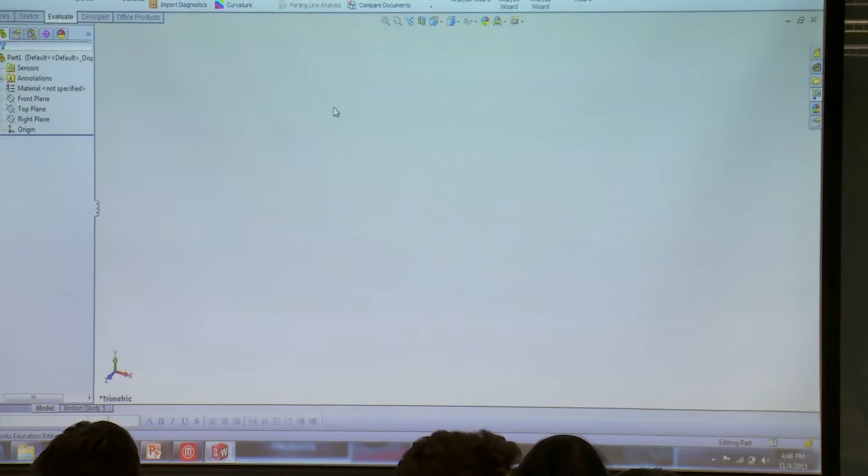Okay, so you're going to start here with just a blank screen. I always double click to get back to the basics, so you're going to want to double click any time to get through something.

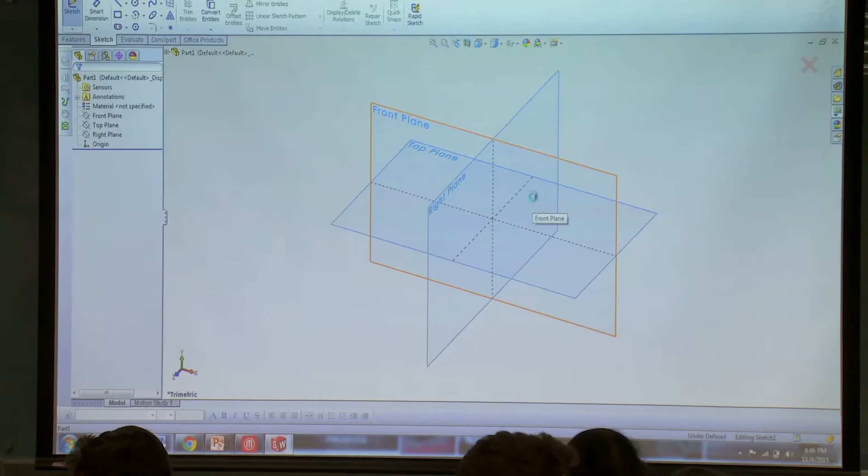The first thing we're going to do is sketch a rectangle. You go up here to sketch, and then you click rectangle. These are all the different pieces you can freehand sketch, which would be one-dimensional or two-dimensional. Every time you sketch something, you have to select a plane - you can pick any one of these. I'm just going to select the front plane, and then click and drag to draw myself a rectangle.

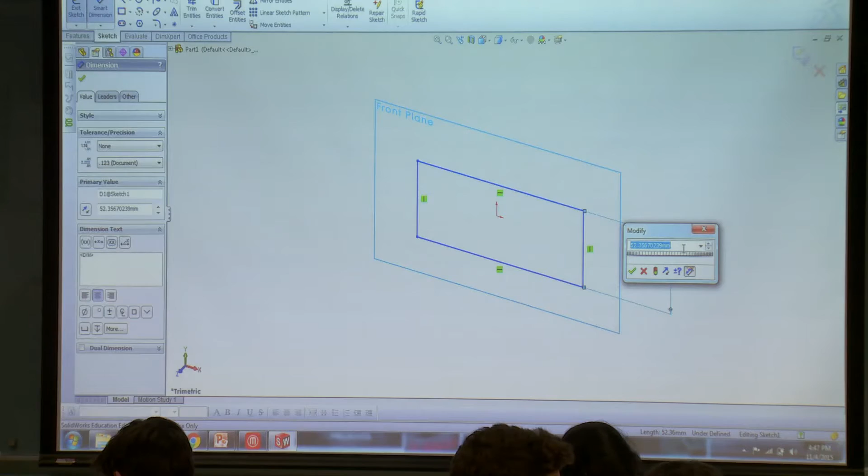The next thing I'm going to use is the Smart Dimension tool. Smart Dimension allows you to set the dimensions of any line. I think right now I'm working in millimeters, and you can type in the dimension right here. I believe if I use inches, it'll take my inches and convert it. So I'm just going to make my birdhouse 3 inches right here, and then I'm going to make it 5 inches on top.

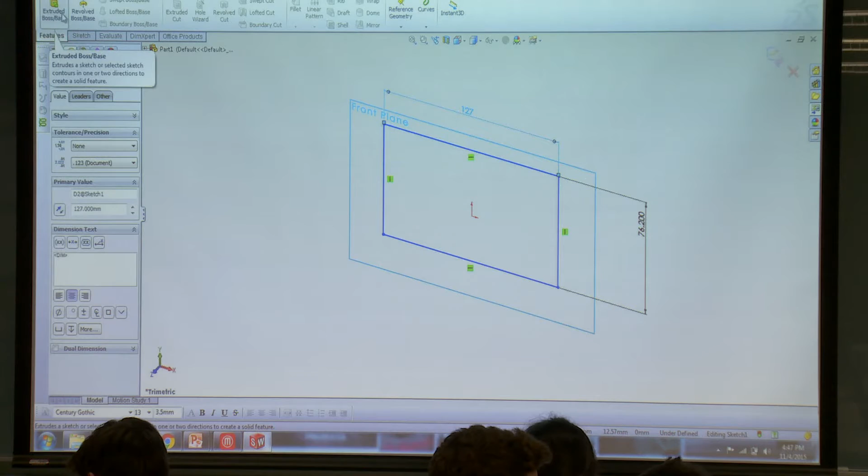So next, we want to make this 3 dimensions. We want to go to features and do an Extruded Boss. These are all the different features you can use in 3 dimensions. Extruded Boss brings the 2 dimensions out into 3 dimensions. So we're going to set that to be half an inch thick.

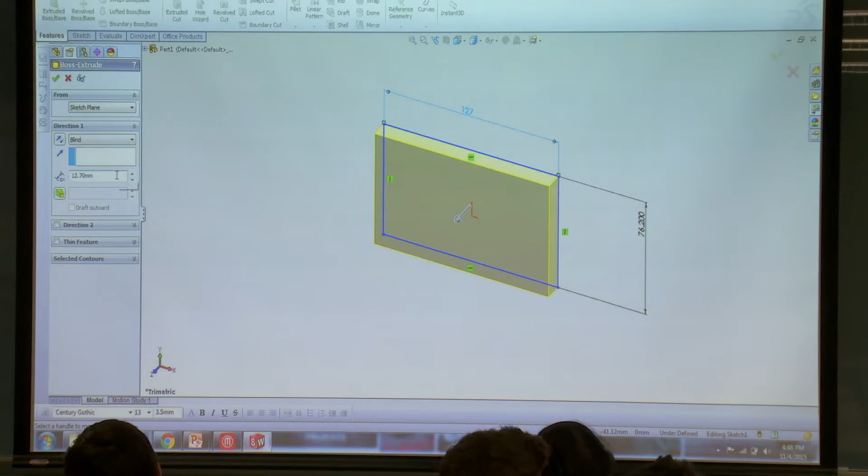And then you just click OK, and there it builds it. You can always double click off. So all right, there is your first plane of the birdhouse.

Is everybody following along? Is anybody having trouble? It looks like it's not square. Or, no, it is. Oh, okay.

All right, you can use your arrow keys like I am. If you have a mouse, it's a lot easier. You can click and drag to kind of move your piece around. But I'm just using arrow keys right now.

These tools at the top, you can use to kind of zoom in. This one on the far left will zoom to fit. This one allows you to zoom into an area, so I could just take it and zoom right into the corner. The magnifying glass takes you back to the previous view.

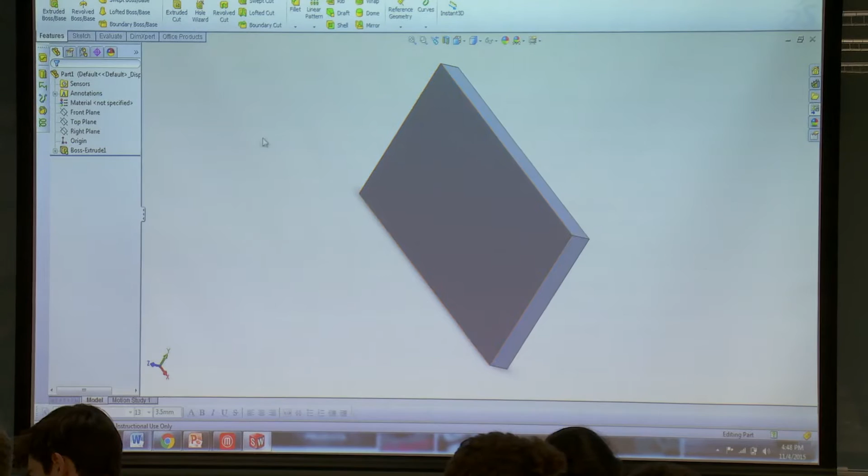Okay, so now we're going to build the walls of our birdhouse. I'm envisioning this right now as the base, even though I built it on the front plane. You can kind of look at it from any perspective that you want.

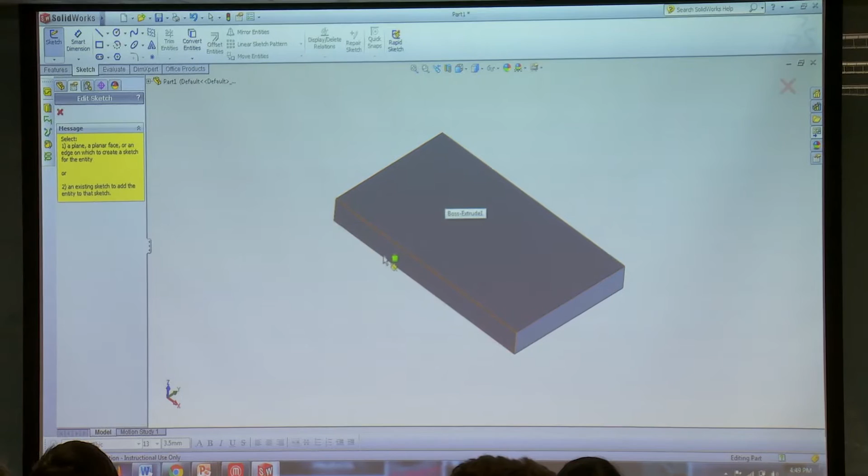So I'm just going to go back to Sketch, and I'm going to select the Line tool. Now the first thing you have to do every time you do a sketch here is select the plane that you want to sketch on. So if you look around, I could sketch on this top plane, or I could sketch on any of these side planes as well. So I'm going to sketch on the top plane.

And then you click the top plane. Now I'm going to draw what would be my walls. So you click, I'm going to click inside, and then I'm going to drag to the other side.

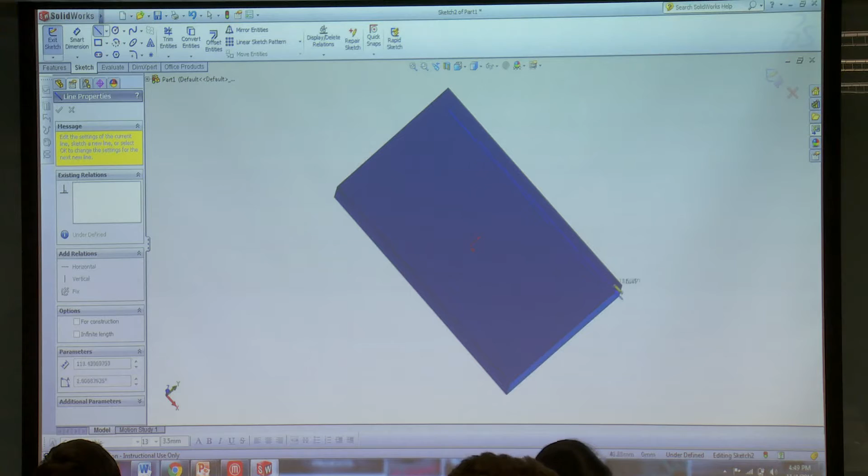You'll notice that the line should kind of lock parallel to whatever edge you're on or close to. So I'm just going to click and draw all these lines, basically a rectangle, and you can kind of see when I bring this line up, it'll line up, and you'll get a cross section right there, so it'll be tangent with another corner.

The orange dot means that it's going to be tangent and collinear, or co-pointal, whatever, with that point.

So now what I want to do is double click off that. In fact, I don't even think those go together. Yeah, no. So you want to make sure your box there is completely filled, lines through. I'm just going to make sure that that's done right.

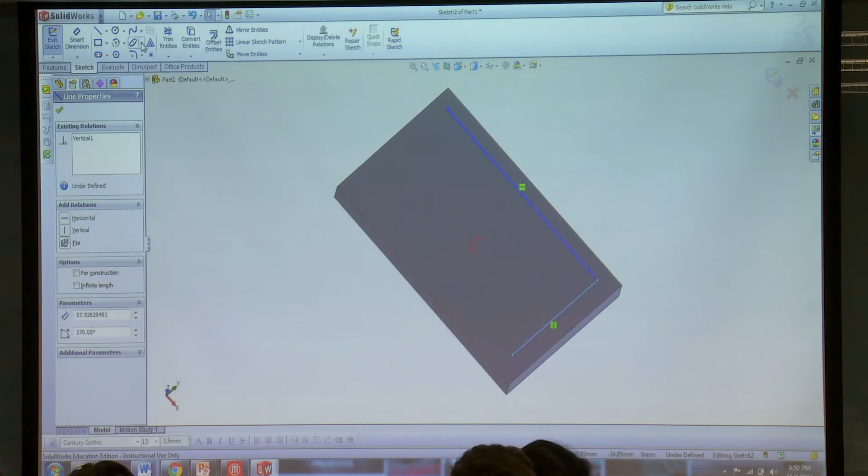Okay, so now I'm going to go back and use the Smart Dimension tool. You can click on a line and Smart Dimension it. So I want the inside to be 2.5 inches.

Now as you can see, the outsides here are a little off, they're not proportional. So what I can do is a Smart Dimension on this side to set the distance between these gaps. So I can do 0.2 if I want, and that'll kind of move it.

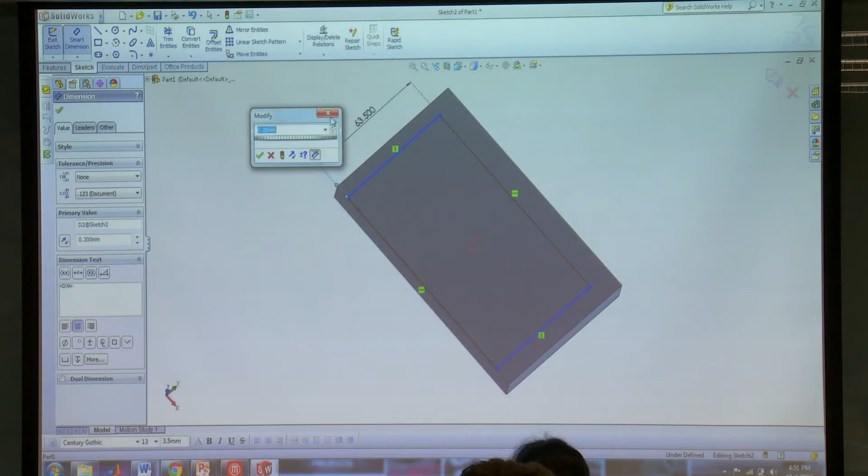If I want it to be exact, I could delete the Smart Dimension. And what I can do is select two lines. So I'm going to draw lines to the edges.

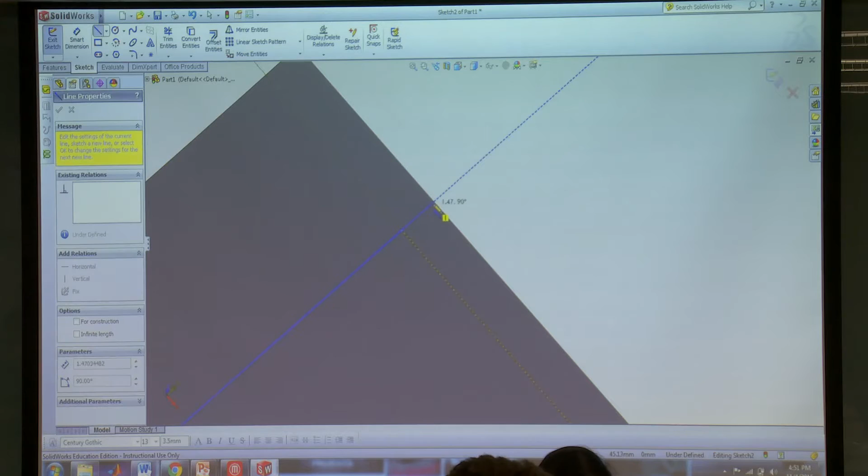This is a chance that you might want to use the zoom in tool to really zoom in there. So now I can select these two lines.

So often you want to double click out to get back to your mouse. And then I want to make them equal.

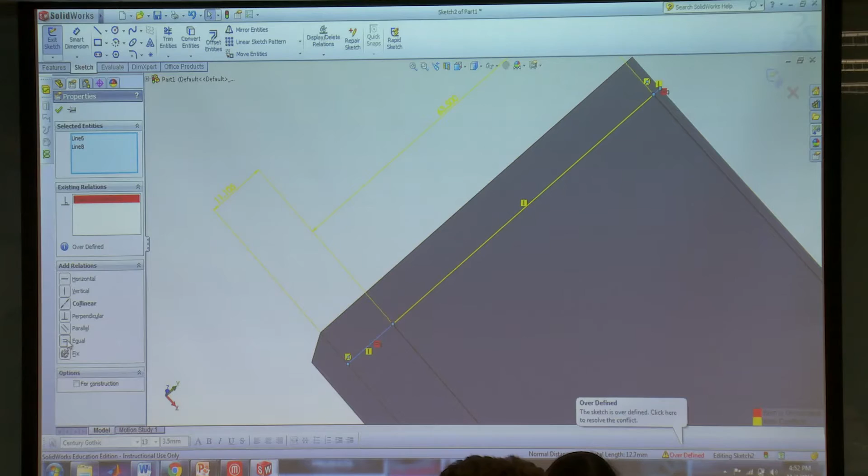Oop, alright, we have an issue. Because this is Smart Dimensioned, oh yeah, I want to delete the Smart Dimension. That's the only way to make them equal.

Is everybody following along with this part? This part's a little trickier, but there we go. We got them equal now.

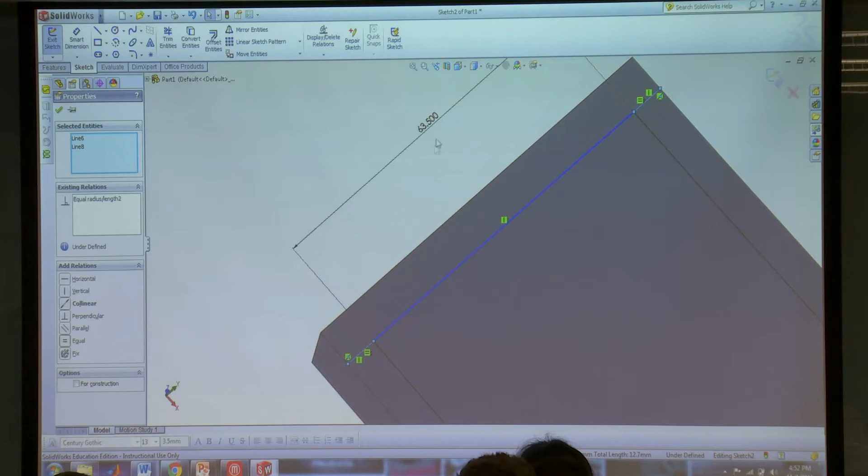Yeah, is there anyone who needs us to pause? How do you get rid of the Smart Dimension? You can just click on it and then delete, push backspace or delete.

How do you make the two lines equal? So if you go and you select the two lines...

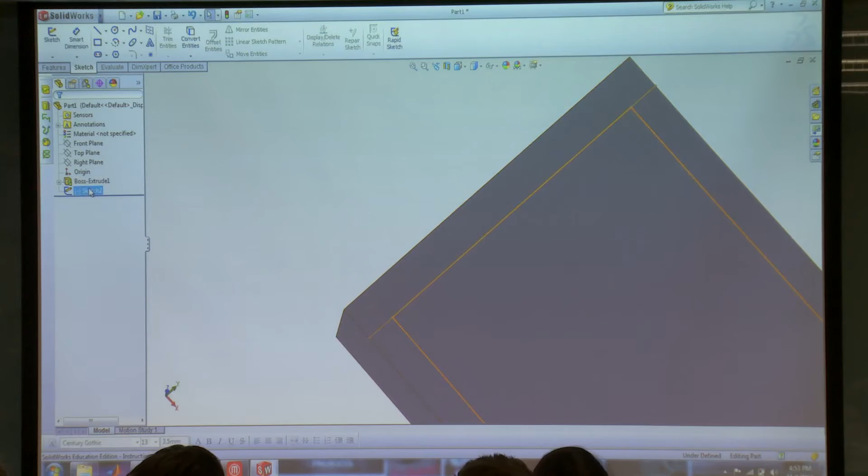So if you ever need to go back, right now I'm back to the main screen, the main project build. So if I click on Sketch 2, I can go up here to the top left and hit Edit Sketch, and now I'm back in the part that I was just working on.

Whereas Boss Extrude 1, you can always go through and title these as well, was that initial base that we built. So if I click one line, it'll select it.

This is how I make them equal, and then I hold Control, but you can also use Shift I believe. You can select the other line, and then there's all these different options down here. So I just clicked equal. So if they were lines that needed to be parallel, I can make them parallel, perpendicular. You can fix 2 points to the same point.

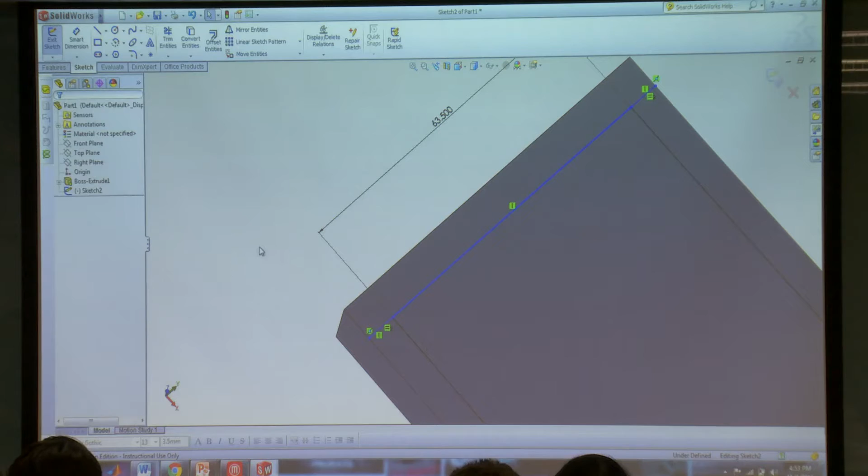And then I double click to get out. I always use double click to kind of get my way, to kind of move back outward.

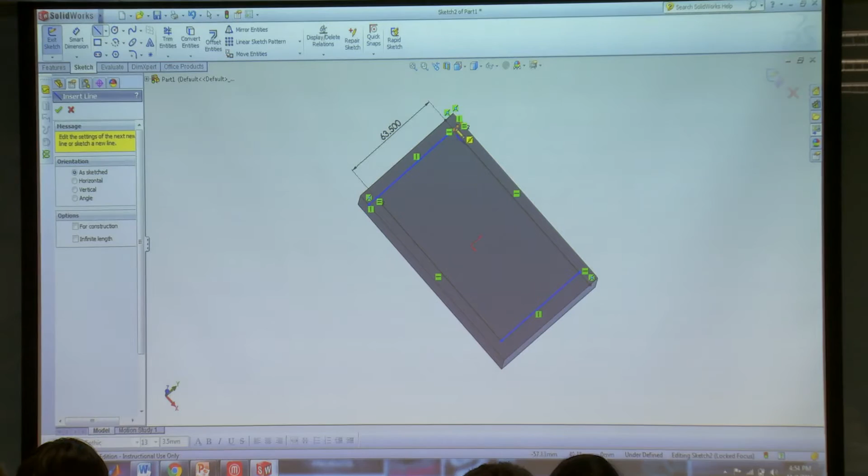So let's go and do the same thing quickly with the other sides. We're going to build 2 lines from these points, and we're going to make them equal. And once they are equal, you can kind of set the dimensions on either way. So as you can see, we use the smart dimension to build this line, but we could do it the opposite way. We could set the smart dimension on the width, or on the gap if we wanted, and it would make the 2 lines equal based on the one smart dimension.

Okay, so now our box is equal all the way around.

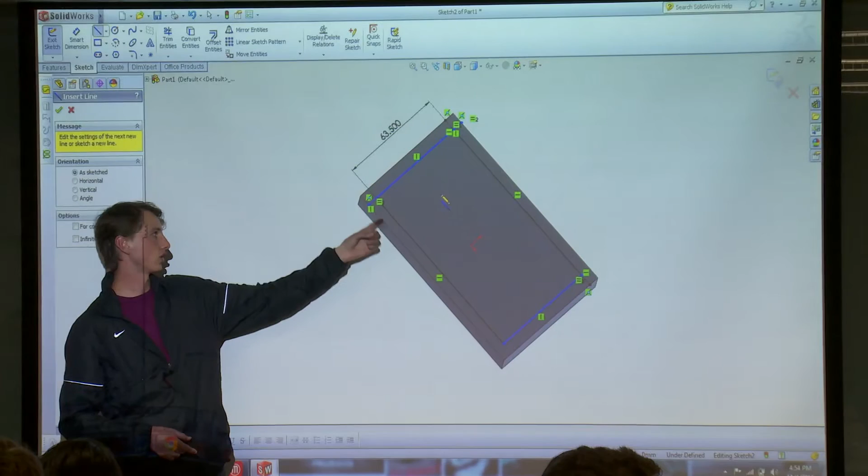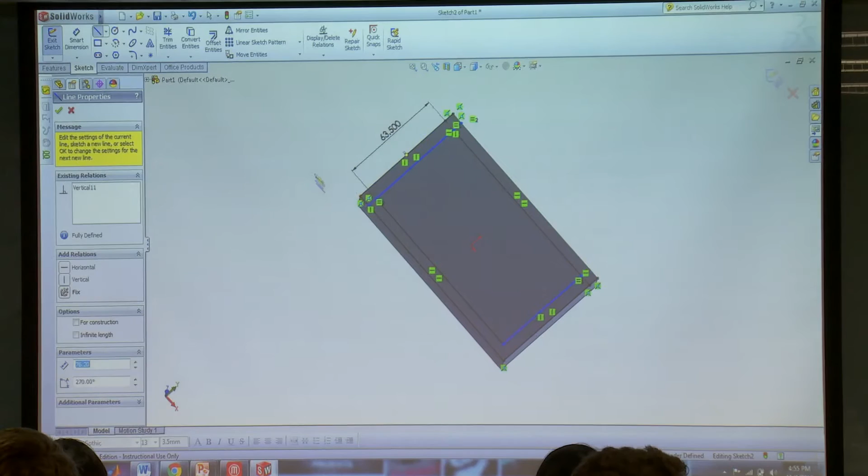So now we're going to build the walls up. What we need to do to build the walls up is we need an enclosed surface. So we could build up right now the inside of the box, because that's considered enclosed by these 4 lines, but we want to build up the outside. So we need to actually draw new lines along the edge, since this is considered a separate sketch than the first one. So you can just use the corner points, and you can just do it in a couple clicks. Just draw to the corner points, each line. Every time you draw a line, if you noticed, it kind of picks up and draws and plans to draw the next line until you get back to a point. So there's our 4 lines around the outside. So now we have the outside of the edge of the wall and the inside edge of the wall.

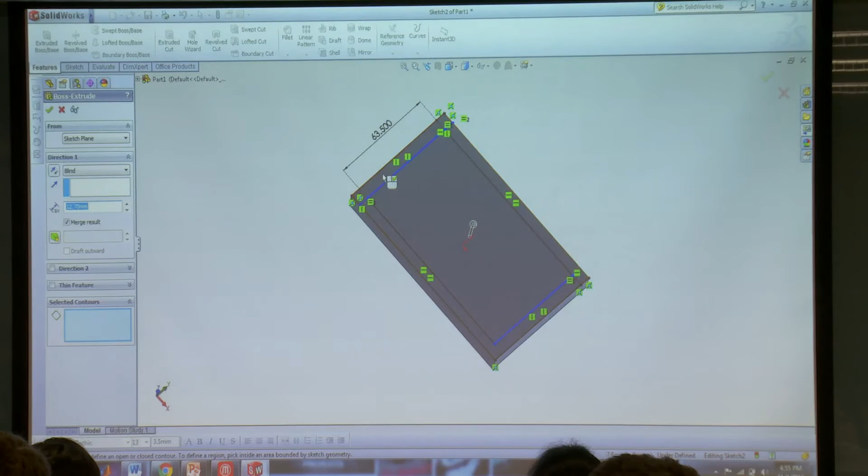So next, we want to close out of that, and we want to go to our features again, and we want to do a boss extrude. Now this time there's multiple spots to choose. Last time there was only one thing that could be boss extruded, but as you can see, the red part is what's going to be boss extruded. So you can kind of select these different points, and it'll be set up to extrude what I selected there.

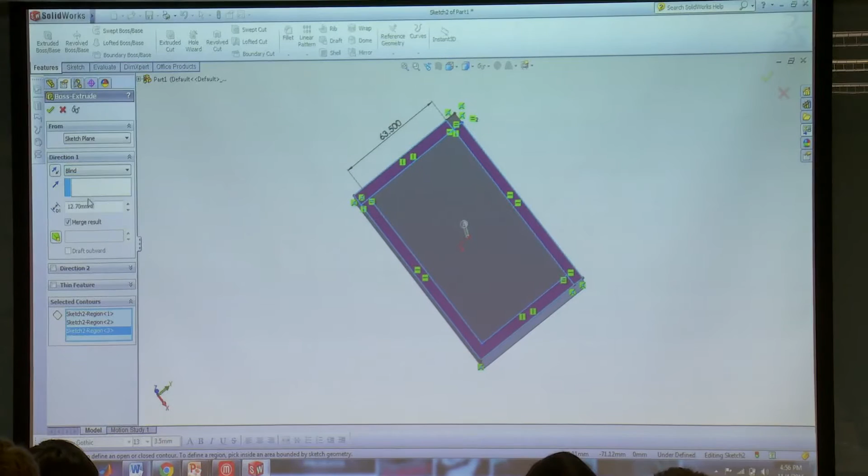There are different options to boss extrude. Usually we use blind - that's how you set just the distance and do it yourself. Sometimes you'll want to do up to surface, so if you have like 2 planes and you want to connect something between them, you can do up to surface and select the surface, and it'll automatically boss extrude up to that surface. So right now we're just going to do blind, and we're going to make our birdhouse 3 inches tall.

And then we check it, and we have rebuilding errors. Might be because there's lines there too. Yeah, it doesn't make it full. There we go. Okay, so make sure you select all the different points around the edge. Those little extra lines that I built to equal out the sizing kind of caused some issues in there.

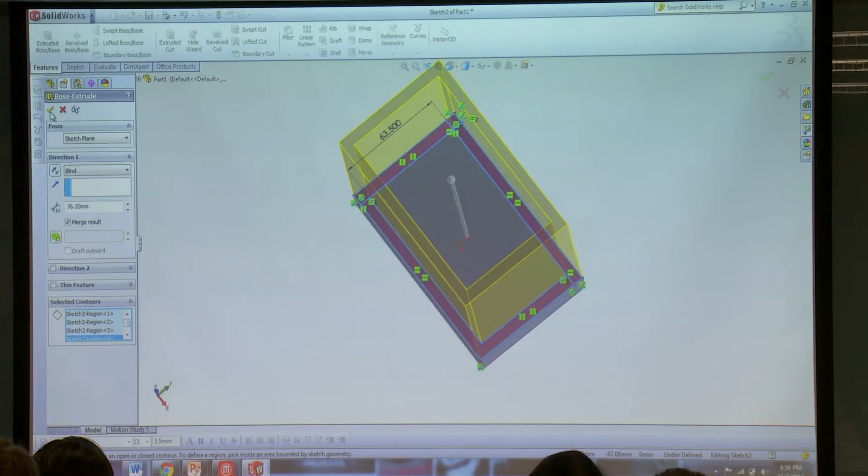Alright, so there is the walls of our birdhouse. So if we double click, we're back to... do you have a question over there? Yeah, how big is the extrude? I set it at 3 inches. You can set it as tall as you'd like.

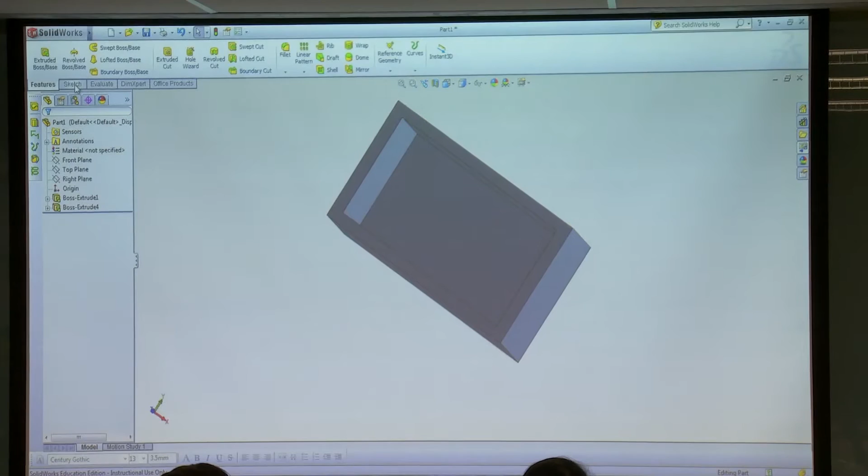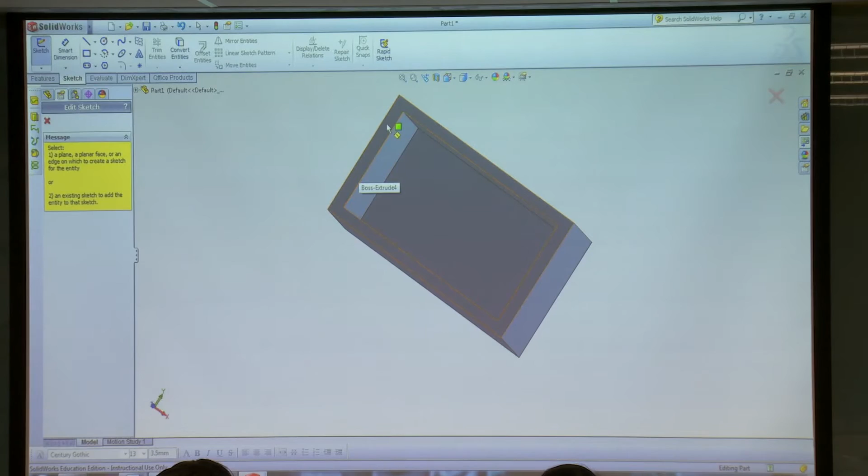So now we're just going to build the top, and we're going to do it the same way we just did the walls, except it'll be a little quicker and a little easier. So we're going to go back, we're back to the front. Is everybody back to the front? Double click out, and then we're going to select the sketch, draw another line. This time we're just going to use the rectangle, because that's easy, and we know that this is a rectangle. We're going to select the plane, which is the top face here. So you don't want to select down in here, you want to select this top plane. You can kind of see how it gets selected. So we're going to select that, then we're going to come from this corner and just drag our box down to this corner.

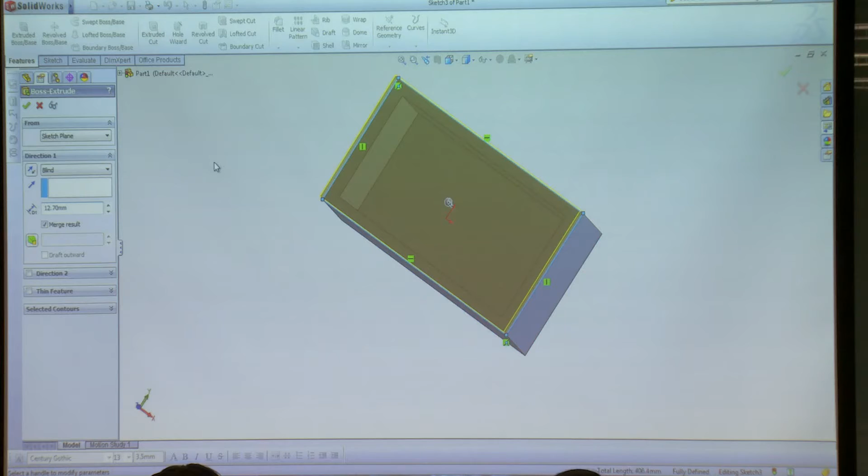Simple as that, and then we're just going to boss extrude that one. This time we only want it to be a 1/2 inch thick. Alright, so now we just have what looks like a box, but we know that it's hollow on the inside.

So now we want to put a little hole in it for the bird to fit in. So we're going to pick the circle tool, the same way we've done the past sketches, but this time circle.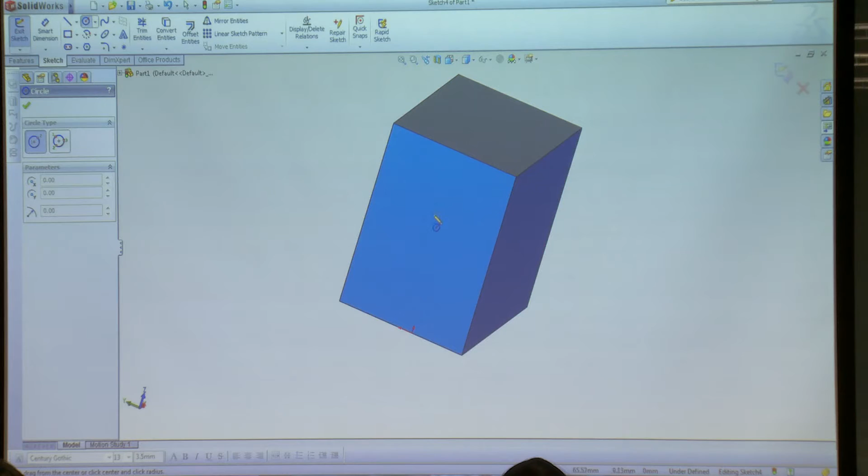We're going to select the face. You can select any face that you want. The circle tool works, you build it from the center. So you select the center, and then you build it out as far as you want. I'm just going to build it anywhere, and then set the dimensions of it in a sec.

So there's my circle. I'm going to use Smart Dimension to pick the radius of the circle, or the diameter. So I want the diameter to be 1 inch. So there's my circle.

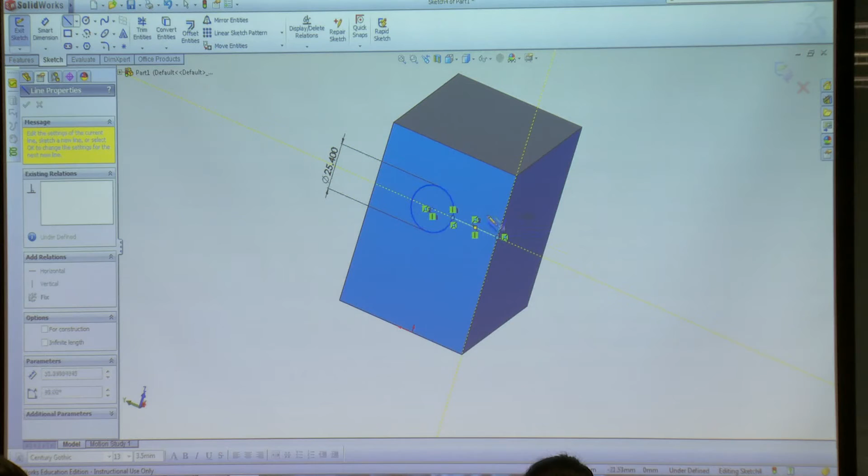Now you could use lines to set up where your circle is, the same way we set up the walls. So I'm just going to set 2 lines on either side and on the bottom. You see where I'm selecting the lines? The points come up so it's tangent, and then I can select it so that it's down. When something highlights orange, that means you're going to be tangent to it. So there I've selected my lines, or I've drawn my lines.

I want to set these 2 to be equal, so that way it's centered. And then this one, I'm going to Smart Dimension, so that I know how far the circle is from the bottom. So I want it to be 1 inch.

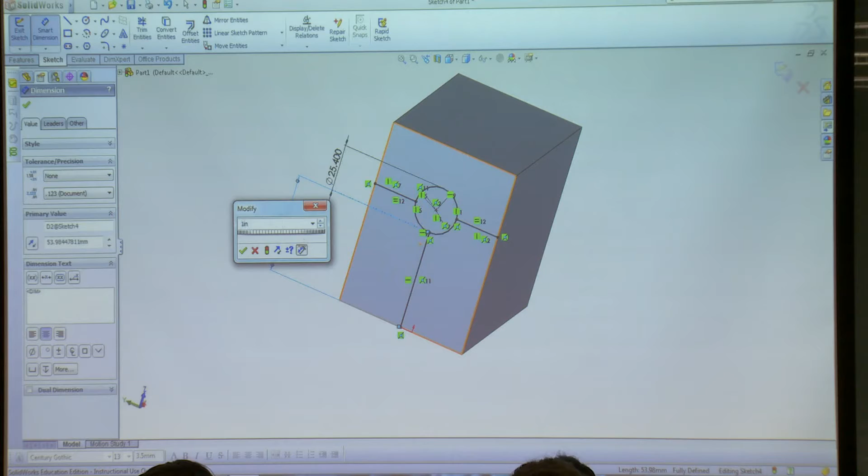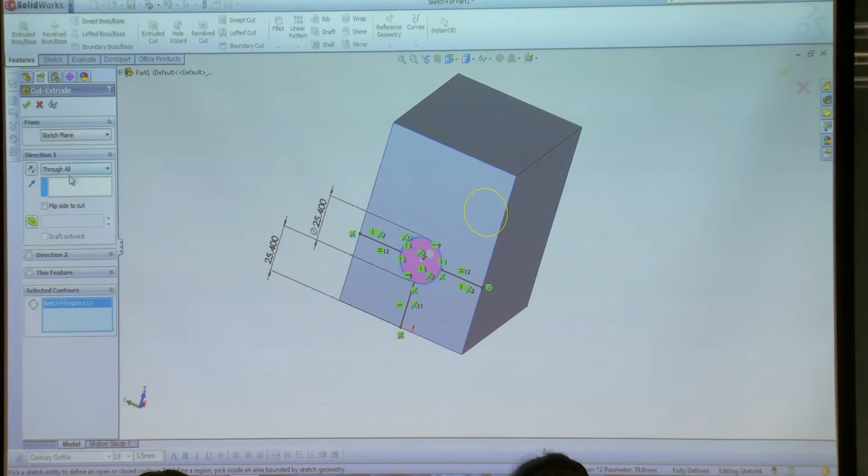Now we're going to cut the circle out, so we're going to go back to our features. We're going to use Extruded Cut, select the circle. And this time, instead of using blind, I'm just going to go through all. Now if you notice, that will actually go through the other side, I believe. So if I do through all, we can check it, and we can see that it does go through all.

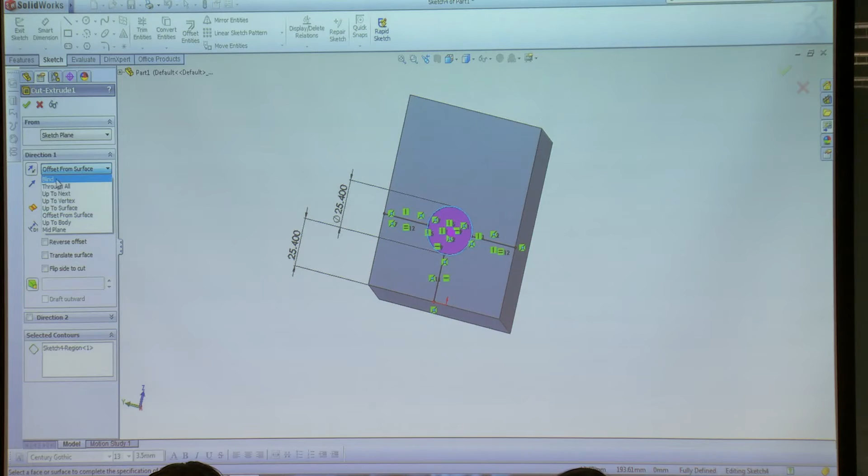So actually this would be a case where we would want to use up to surface on the other side. To go back into it, we can click Cut Extrude, go to Edit Feature. I'm not going to use up to surface just because I can't see the inside of the box, but I know that the thickness of the wall is a certain amount. So if I set this to 1 inch, it should be enough to cut through.

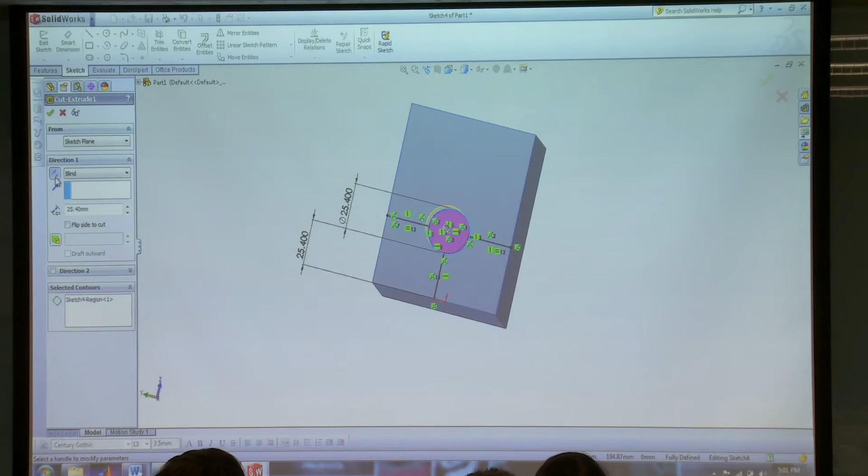And it didn't go the right way. So this little button here, it selects which way you're cutting. So if I click that way, obviously it's trying to cut out of the box, which wouldn't exist. So I want to cut into the box. So right there, I've cut into the box.

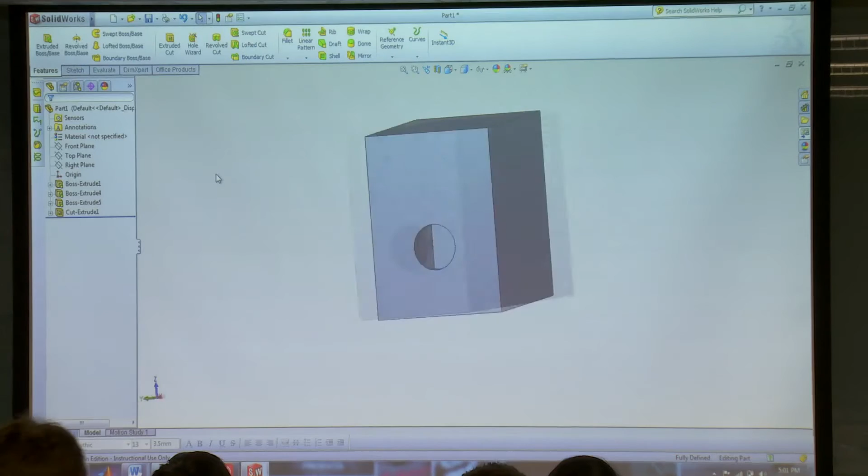And now we basically have our birdhouse. The last thing we're going to do, what you could do is go through and add a little post, but to save time, we're not going to build a little post right about here. What I just want to show you guys is how to round off edges, which is pretty simple. You just use the fillet.

So because what we've done is already built, we don't need to do a new sketch. We can just go to fillet, and we can select the edges that we want to fillet. And then we can select, this is the radius of what would be the fillet. You'll kind of see it once I select it.

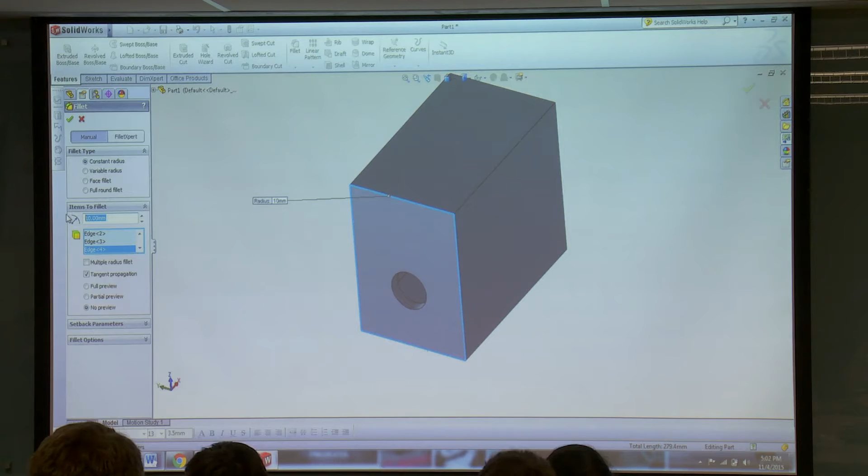We're just going to do this in millimeters. I guess 10 millimeters is probably pretty good, and we'll see how that looks. So there we go, we've rounded the edges. And you can kind of get a feel, if you want to go back and make them less round, you can change the radius. You can kind of get a vision of what it's going to look like.

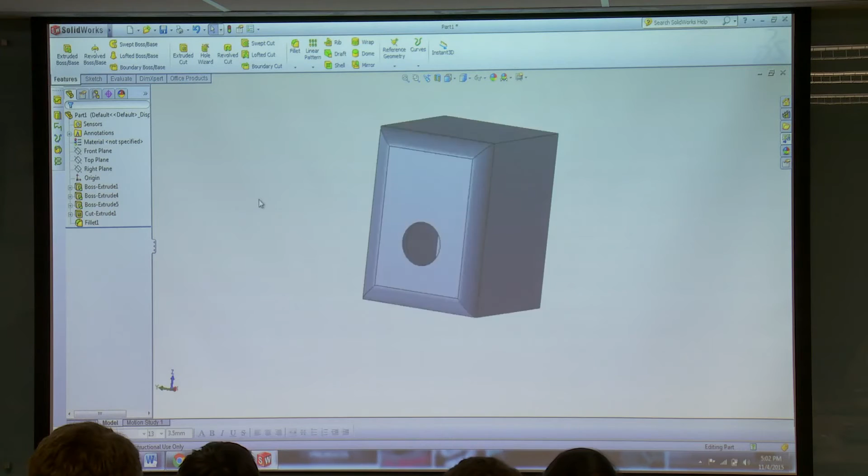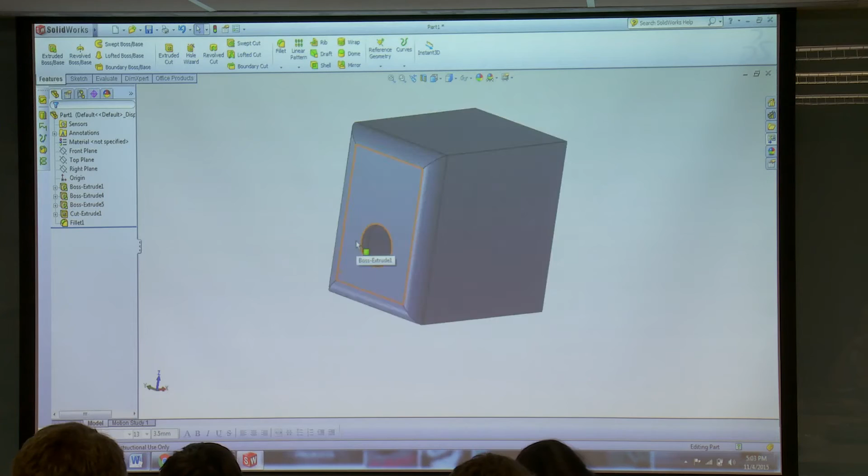So anyway, that is a simple way to make a quick birdhouse. You could obviously keep building off this. You could sketch things, cut more things into it if you wanted to do some designs on the side, or build the post out, but I figured I would just give you guys a quick demo of how to put a couple pieces together. The cut extrude and the boss extrude are the main features that you're going to use when you're building things, and also the sketch tools. So that is your birdhouse demo. All right.

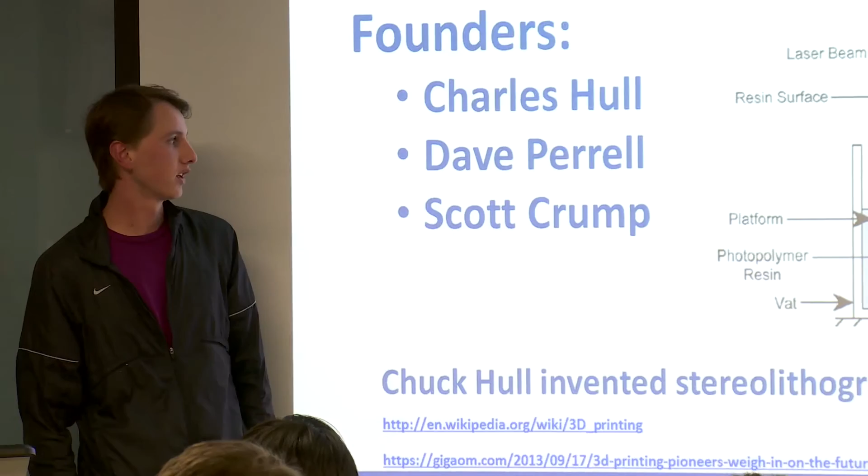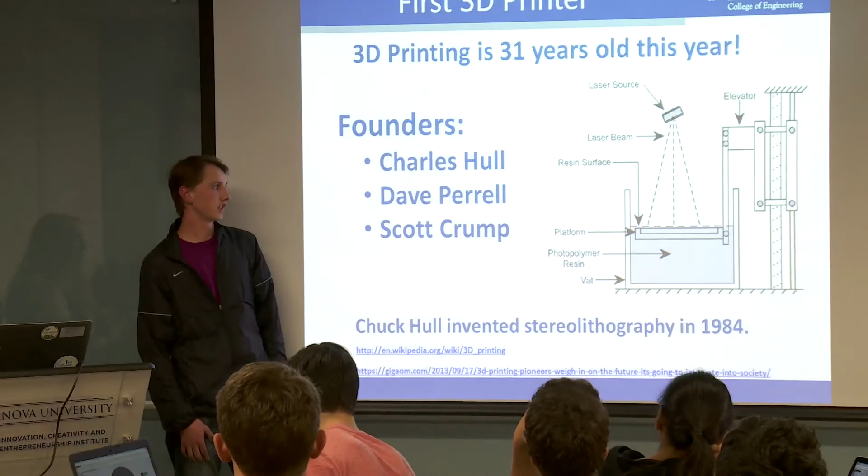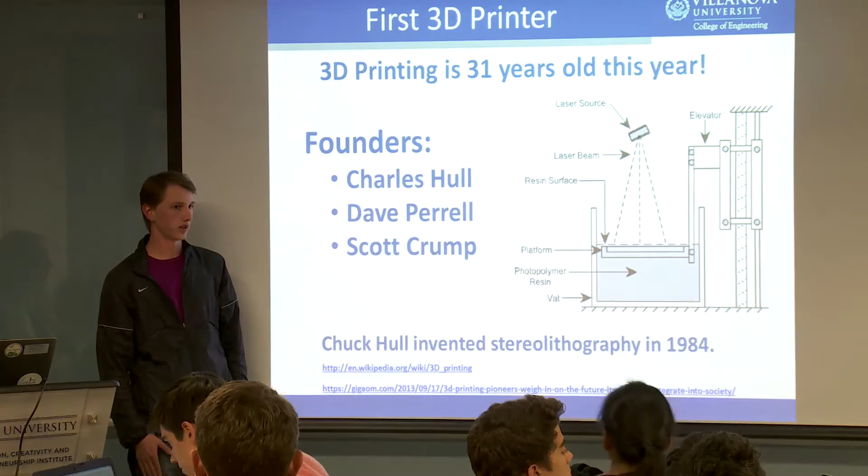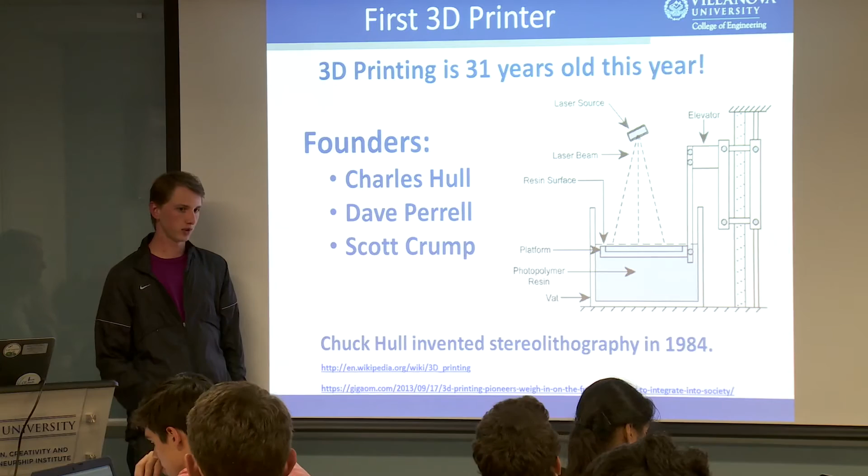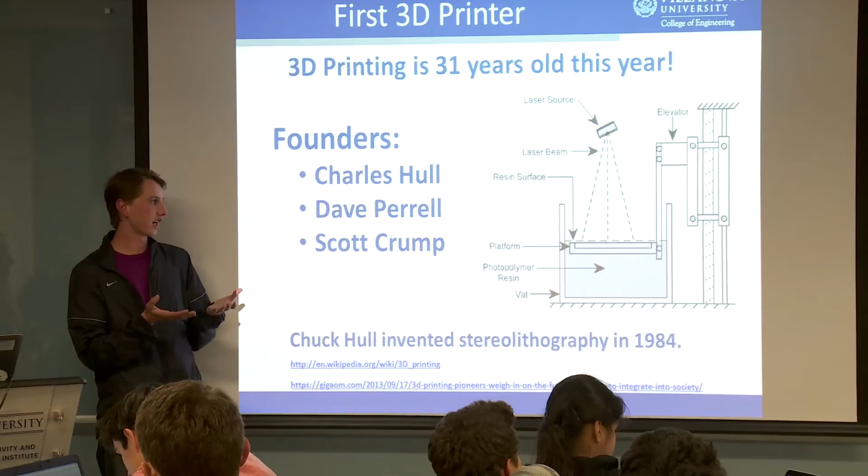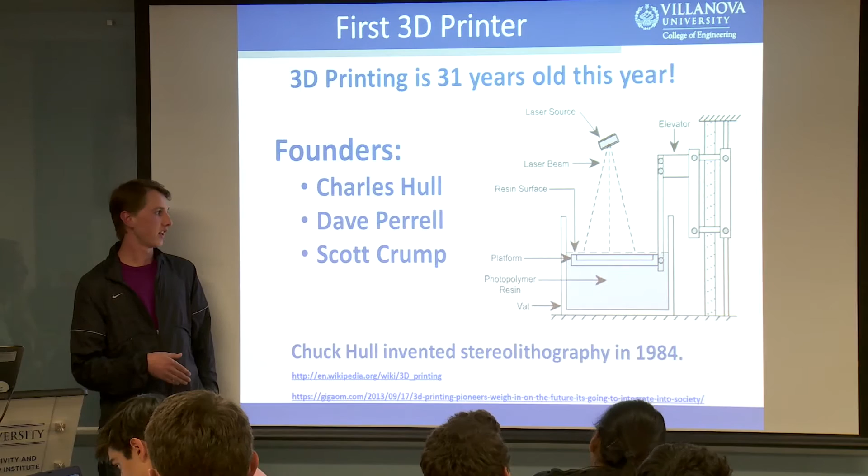So the 3D printer layers plastic through the heated laser all the way up until it's built your project. The one at Sear also uses a support material — this one does not. So if you want to build, let's say you're printing this birdhouse, and you want that top panel there, the printer would have to fill the entire birdhouse with support material so it could layer the top platform on top, which is kind of inefficient because the support material costs money and then you have to clean it out. So if you're building an enclosed structure, think about that and how you're going to get the support material out.

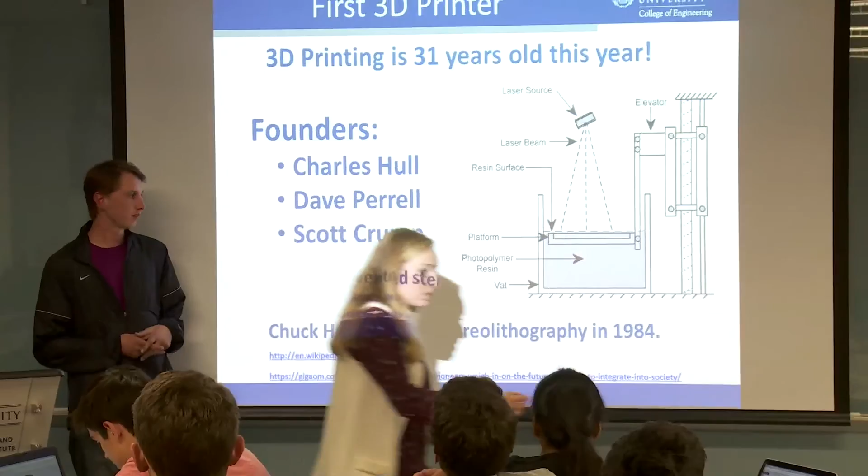Actually, I'm going to grab one of these just to give you an idea. I was talking to George Simmons about this — you see this specific part, it has 2 holes in the center here, and the way he printed it was this direction. You can see where the support material was placed so it could make this extrusion here. But what would go faster is if you actually printed it like this. The thing is, in order to build on top of it, this would all have to be full of support material, all what's inside this hole. Since you print it the other way, it's going to take probably 3 times longer, but that's a sacrifice you have to make when it's going to cost a lot less money, because you don't need support material here since there's nothing on top of it.

So when you're creating your ideas that you can send to me, think about the support material and how you can be methodical when you're making something that you're going to 3D print. Like Will said, if we actually tried to do the birdhouse, it would have to fill the whole inside with support material, and that's almost just as expensive as the actual plastic itself.

This is actually Villanova University's official presentation for the 3D printer, so this is just a little bit of background on how it came to be. We do have this particular Makerbot — we don't have this one here, that's the one we have in the back. You can make all sorts of different things with that other machine, but that's a different machine that we don't have here.

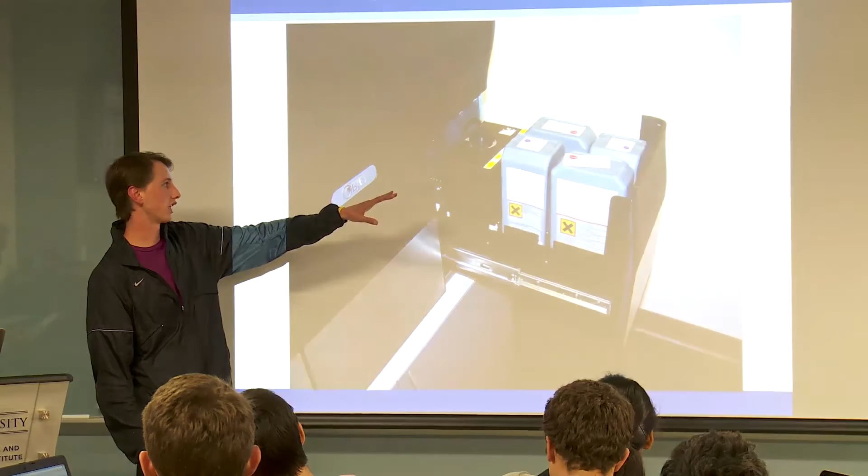So these are the resins that you can use. Our printer only does two colors, cream and black. There are four containers needed, one for each color and one for the support material: white model material, white support, black model, black support.

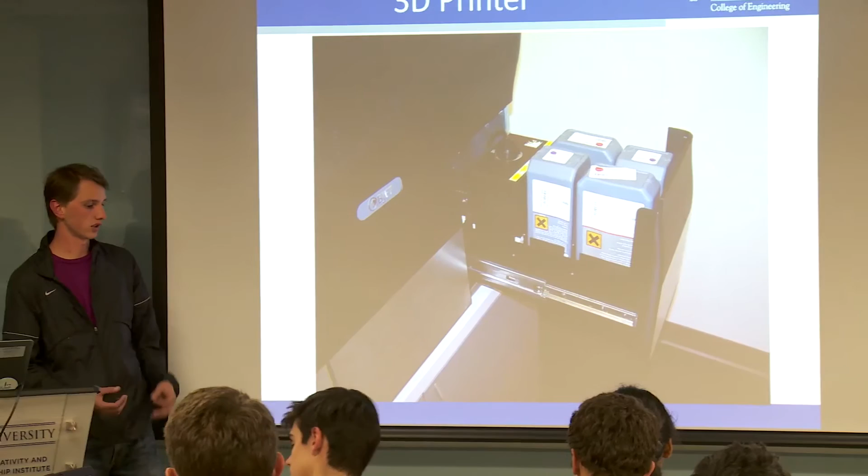So that's where you load the material, and the one over in SEER is a liquid, so it kind of uses the liquid and heats it up to a solid.